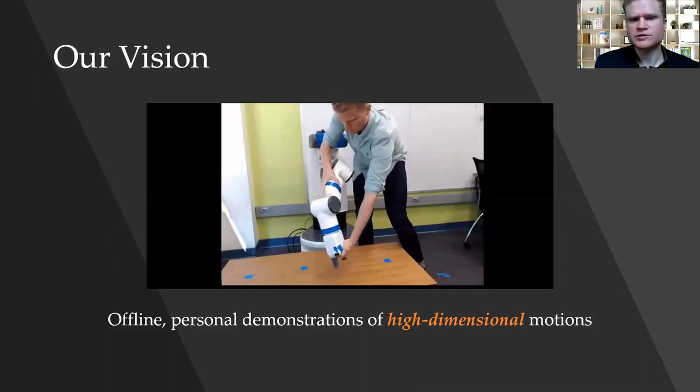I want to show you a vision of how this could work. We imagine collecting offline, personalized demonstrations of high-dimensional robot motions. Here I'm providing those demonstrations through kinesthetic demonstration. We can also imagine them being provided by a caretaker, or even just by controlling the robot using the joystick as it currently is done.

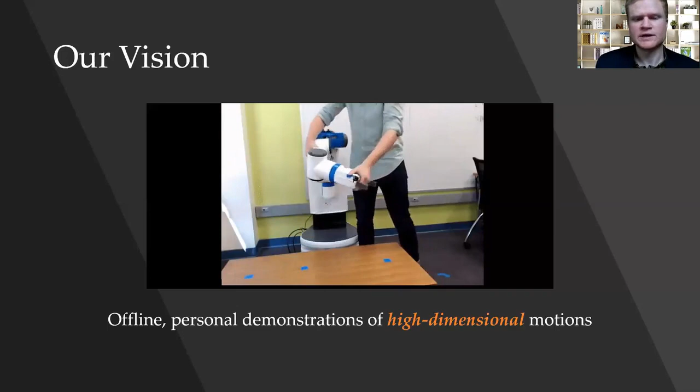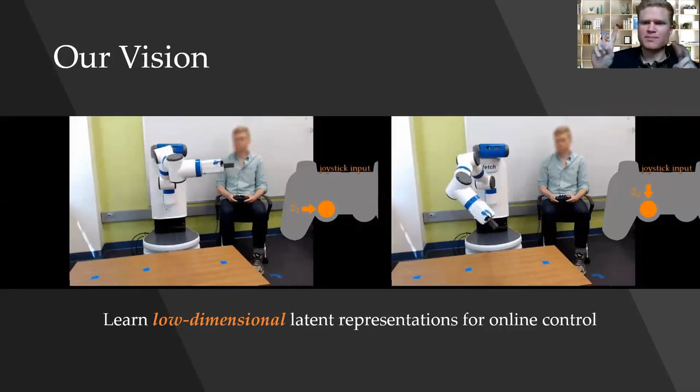Next, I'm going to embed those high-dimensional actions into a low-dimensional latent space, which I then give to the user to control the robot. Here, one dimension of that latent space causes the robot to move across the table, and the other dimension causes the robot to perform a pouring motion. So overall, the big idea is that we want to make it easier to control high-dimensional robots by embedding the robot's actions into a low-dimensional latent space.

There are a few different properties we want this latent space to have in order for it to be intuitive to users. The first, and the one I like the most, is conditioning. Imagine you're using this latent space to pick up a glass of water—maybe pressing up on the joystick brings that glass to your mouth, and that makes sense. But what happens in a different context, like grabbing a doorknob? Pressing up on the joystick shouldn't bring the doorknob to your mouth. In fact, the way the robot interprets your inputs should depend on the context it's currently in.

The second property we want these systems to have is that they should be controllable. Recall that when we're training these systems, we provide demonstrations showing them different tasks and skills. We want to make sure the user can recover all these different skills that we showed at training time, at test time. So for example, imagine you're given a start and goal state that were originally in the data set. We're arguing there should exist some latent input Z, or perhaps a sequence of latent inputs Z, so that you can move from the start state to the goal state.

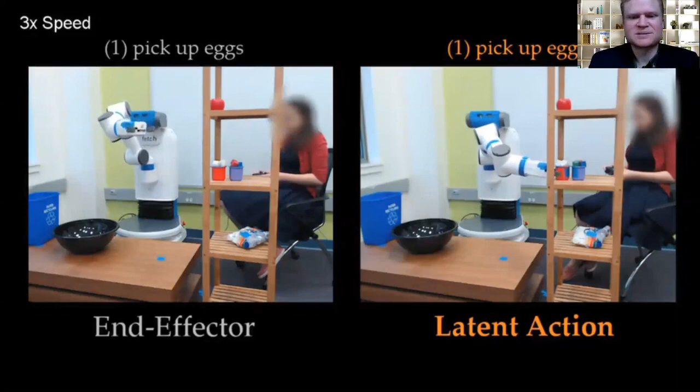On the left, we're going to show the end effector mode, and on the right, our latent action approach. All videos are shown at 3 times speed. Here are the users doing the very beginning of this apple pie—they pick up eggs, pour them into the bowl, and then drop the container into the recycling bin. You'll notice on the right, with the latent action approach, they're already off and running, almost complete with the task, whereas on the left, with end effector, they're lagging behind.

We saw this pattern across the different users, where regardless of who it was, they were able to complete the task more quickly using our approach.

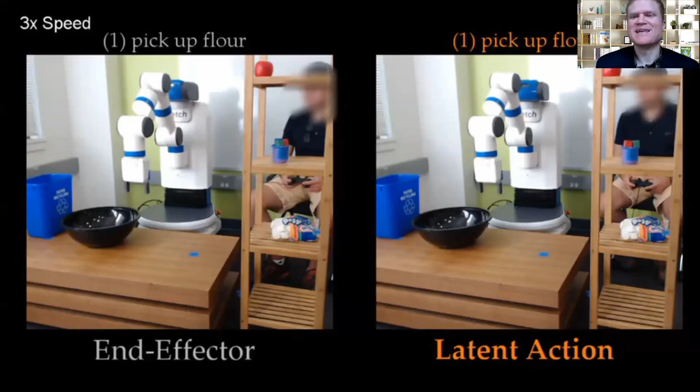Of course, we tried different tasks as well. Here's another part of making an apple pie, where now we're trying to grab the flour, pour the flour into the bowl, and then return the container to the shelf.

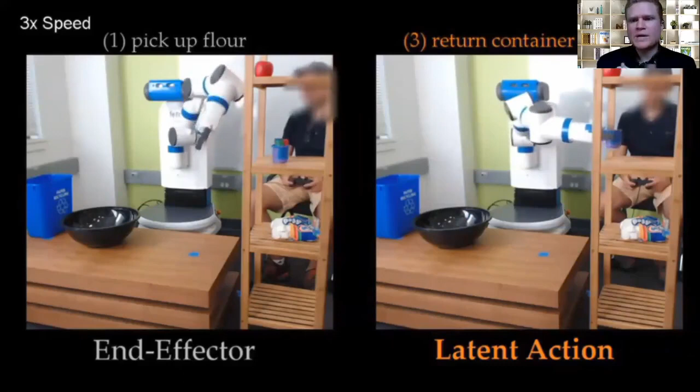We didn't provide users with practice time with either method. They sat down and immediately started performing the task with either end effector or latent actions. We counterbalanced the order of presentation so that half the users started with the latent action approach and half started with end effector. You'll notice that this user is very stuck when using the end effector method.

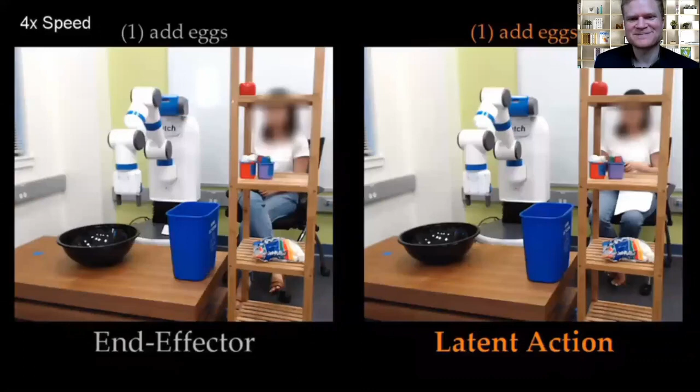Finally, we also tried moving things around in the world. Because the conditional variational autoencoder is conditioned on the state, changing the state itself shouldn't really matter—the robot should still be able to recognize what actions it should take.

Here you're going to see the full task of making an apple pie, and we've moved where the recycling bin is, where the shelf is, etc. This is shown at 4 times speed. This user has already successfully dropped the eggs in the bowl and is moving on to the flour, whereas on the left with end effector, they're stuck at the beginning of the task.

One fun thing about this is that people were able to control the robot to do these tasks in different ways, or even to do slightly different tasks, because they were given control of the robot. They could use this latent space to do different things they wanted in the world. For example, stirring was done very differently by different users—this user sort of mashed, other users would stir in a circle, etc.

Okay, so to summarize this part of the talk, we're excited about assistive robot arms because they're dexterous. They can do these complex things, but the dexterity is also a burden because it makes it hard for people to control these robots.

So what we did is propose that we can embed high dimensional actions into a low dimensional latent space. We learn this latent space directly from data and give it to a user. In order to make sure it's intuitive to that user, we tried to capture 4 different properties we wanted to have. We then trained these latent spaces based on an efficient amount of data, about 7 minutes of kinesthetic demonstrations, and performed a cooking task where people were able to make an apple pie using the latent space.

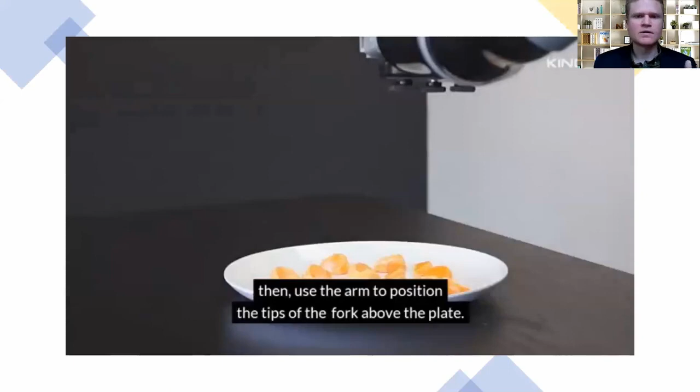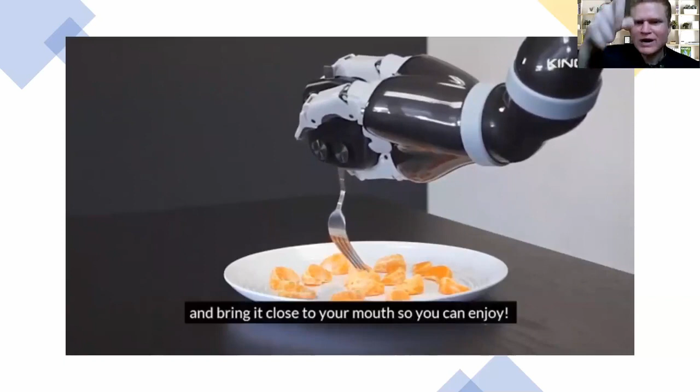For example, eating. Here you can see someone controlling their assistive robot arm to try to grab different orange slices. Notice how precisely they have to manipulate this robot to get directly above the orange slice they want before stabbing down. We tried doing the same thing with our latent action approach by itself, nothing else. Here are users trying to stab a marshmallow they want to grab. Notice how much time they spend trying to line this up, and they still miss.

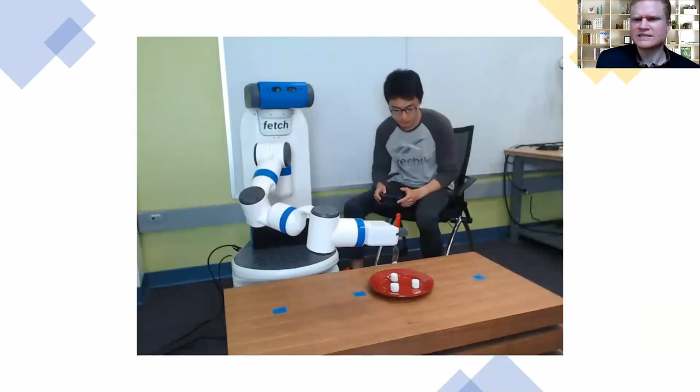They weren't able to exactly get the marshmallow they wanted because of how precise the task needed to be. This suggests that latent actions alone may not be enough to solve these more precise manipulation tasks. So our insight is that we can combine these learned latent actions with shared autonomy, a paradigm for assisting the user, in order to enable precise assistive manipulation for applications such as eating.

So with this eating task in mind, imagine you have a plate in front of you. There are many different things you could want on the plate, but you'll notice they're kind of discrete goals. I might want to reach for the rice, I might want to reach for the tofu, etc. Imagine you're working with a robot to reach one of these different discrete goals.

The robot starts with its gripper somewhere above the plate, and you start by controlling the robot, moving towards these different goals. At the beginning of the task, the robot has a belief, or confidence, over which goal you might want to reach. Initially, let's say this belief is uniform, so half the time the robot thinks you want to go to the rice, and half the time the robot believes you might want to go to the tofu.

As you start actually moving the manipulator, the robot can update this belief. Here, because you're moving towards the rice, the robot updates this belief to be more confident that the actual goal you want to achieve is the rice. Similarly, if you were to move towards the tofu, the robot could become more confident in the tofu.

The idea in incorporating this belief is that it gives the robot a sense of these different discrete goals, these different dishes on the plate in front of you, which one do you want, where do you want to go? And if I know where you want to go, the robot can then help you reach that goal and stay there. We argue that we can incorporate this belief within our latent action approach to improve its performance.

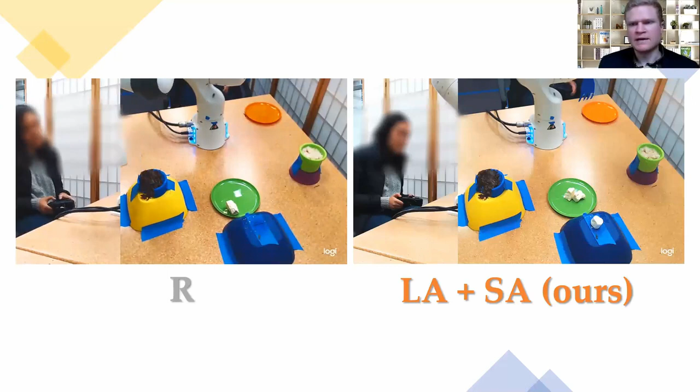Throughout this whole time, they're controlling the robot using a joystick. The robot recognizes that there are 4 different goals the human might want to reach: the plate with the marshmallow, the plate with the icing, the rice, and finally the plate that the human wants to put this assembled thing on.

You'll notice that throughout this task with just retargeting, the human's almost always in the same orientation. They're kind of always holding the end effector perpendicular to the table. We're calling that a stabbing orientation, and the robot is almost always perfectly aligned with it. It never gets into a scooping motion when using just retargeting by itself.

Now let's see how our approach works. Remember, the robot knows that there are a few different discrete goals I might want to reach towards, like stabbing the marshmallow. And once I get to those high-level goals, I can then control the low-level preferences, such as stabbing or scooping, using the latent actions.

You'll notice that the user was able to correctly scoop into the icing to push that onto their marshmallow. Finally, they dip it in rice and put it on their plate.

I want to show 2 contrasts here. First, the user was able to complete this task much more quickly when using our approach. Second, they are able to actually change their low-level preference once they reach these different goals. You'll notice that they switched from a stabbing orientation to a scooping orientation when they were trying to grab the icing, which they weren't really doing when they were just using end effector control or retargeting by itself.

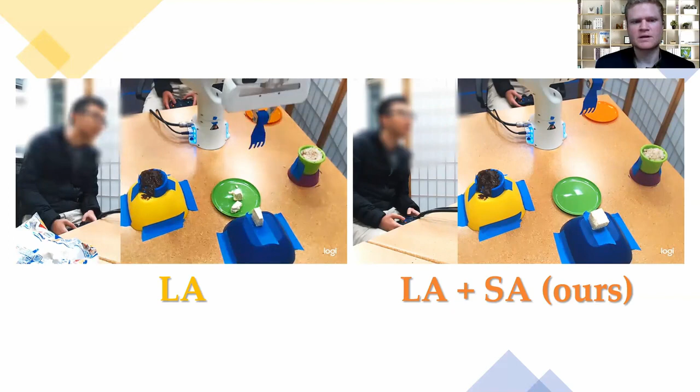Okay, I want to do one more experiment. This is going to be a slightly different task, but here comparing just latent actions by themselves with latent actions plus shared autonomy. Here, the user is going to try to reach for some tofu, then align the end effector so I can cut the tofu, and finally scoop the tofu onto my plate.

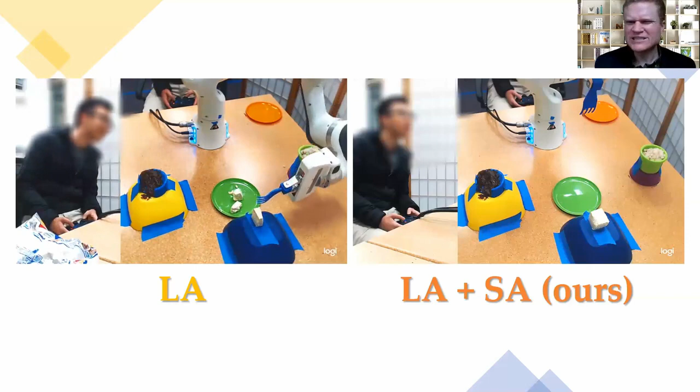Again, I only ever have access to one joystick, up, down, left, right, in order to control the bot to perform this entire task. Without shared autonomy, the robot has no sense of goals. It doesn't recognize that, hey, staying near the tofu might be important to the user.

And so this makes it really challenging for the user to really precisely control that end effector. They reach the tofu, but then as soon as they start trying to change the style, changing that low-level preference, maybe just to cut, the robot starts drifting away from their goal. They don't have any help. There's no autonomy helping assist them to maintain that goal. And so they're fluctuating throughout the task.

Next, let's see what happens with our approach. Remember that here the robot knows that, hey, the tofu could be one goal the human has. And when the human reaches towards that high-level goal, the robot will use shared autonomy to constrain the user above that tofu. Then it's up to the user to control these low-level preferences, cutting from the side, scooping, etc.

This makes it much easier for the human to complete the task more quickly using both latent actions and shared autonomy. Users are able to complete this task in about half the time, and for this particular user, you'll notice how they're able to change their alignment between scooping and cutting much more consistently with our approach.

In the second half of the talk, we mentioned that latent actions are certainly effective and that they enable users to control high-dimensional systems with low-dimensional inputs. But just latent actions by themselves aren't really enough for these precise manipulation tasks. Remember Han completely missing that marshmallow when he tried to stab it.